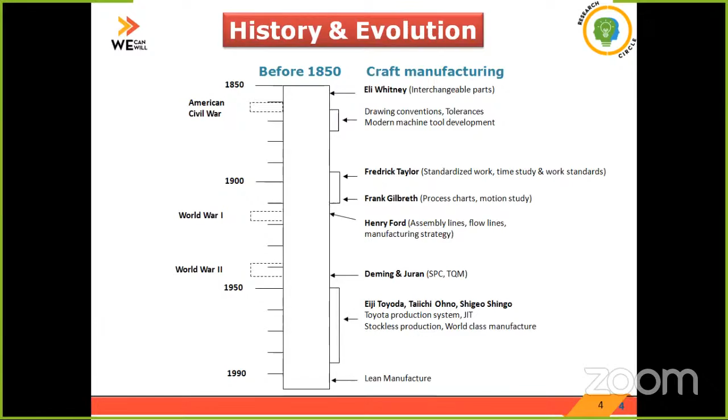So these are the issues which lean manufacturing has been addressing. Basically, the inventory in the stock room is growing, so we have to reduce the inventory. The lean manufacturer takes care of the inventory. So how do we grow? How do we make the right product at the right time? We have to make a competitiveness in our manufacturing...

facility by improving the product cycle time. Then how do we lower stockroom inventory, or have a mechanism for reducing the inventory? How do we maintain a good quality product? We have to maintain zero defect in the product as well as the process. So these are the areas where lean manufacturing helps us grow. What is the growth strategy which we are following in the business? These are the questions in front of us.

And the answer is we could hire more people and buy more machines. Or other strategies, we could raise the price of our product, which is not practically feasible because there are a lot of competitors in the market, and the customers are there. We could hire more people and buy more machines, but that also leads to less productivity or less profit for the organization.

So currently our customers are asking to reduce the price of the product. In the competitive scenario, there will always be a concept of cost reduction, and the customers are asking for price reduction. So before we do anything, we need to become more efficient in our manufacturing, and we need to find the waste in our process. That waste is what lean management addresses. So our process should be lean in the sense we have to find our waste and cut out the waste so the process becomes very robust, very simple, and more efficient.

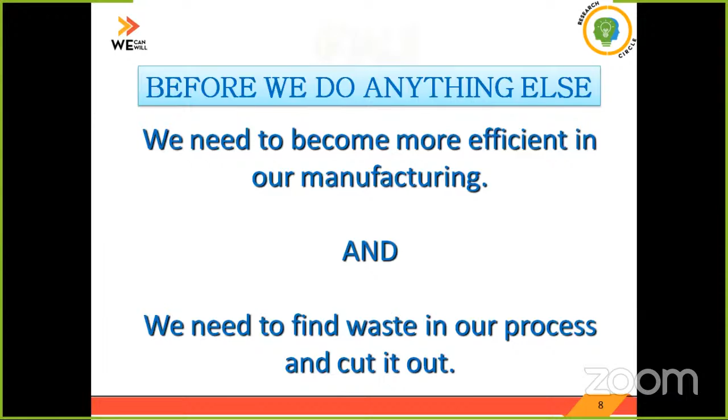in manufacturing. So the goals of lean manufacturing are to produce more product using the current resources. That means we have to produce more product using the current resources, improve the productivity, and lower the stockroom inventory, or reduce the inventory. Then we have to make an accurate forecast of exactly how long it takes to make the product and ship them on time. So we have to give the customer the product at the right time, at the right place - all of that needs to be assembled at the right time. So right time, right place is the major philosophy which we follow to maintain the customer relationship or to enhance the customer satisfaction in the process.

So what is meant by lean? You can see here an elephant and a rat. Basically, lean is a systematic approach to identify and eliminate waste through continuous improvement in pursuit of perfection. So all the processes should go toward a stream of perfection. Once you are perfect in the process, you will be able to apply lean, reduce rejection or wastage, or reduce the inventory, etc.

So what we have to do now is first identify the waste associated with our processes. The different types of waste are coming in the next slide. We have to identify the waste associated with the production activities, and we should have a mechanism to eliminate the waste through continuous improvement.

We should not stop our activities assuming that everything is perfect. No, it is not like that. We should have a system of continuous improvement by identifying the waste, then eliminating the waste through continuous improvement in order to have a path of perfection. So that is called lean.

So lean means the process will be very robust. We will be identifying the defect or waste, and we are taking steps to eliminate the waste. So that is called lean.

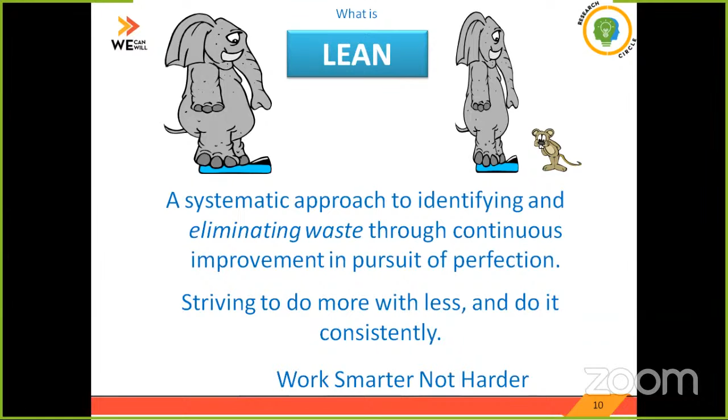The purpose of lean is striving to do more with less, and to do it consistently. We have to make a consistent product in the course of production, and we have to work smarter, not harder. We should be smart enough to work so that we achieve the goals.

Another definition of lean is that it's a systematic approach to identify and eliminate waste. So in a systematic way we have to identify and take action to eliminate the waste, what's called non-value added activities. We have to consider only the value added activities during the process, and eliminate all the non-value added activities.

This is done through continuous improvement by following the flow of the product and the pull of the customer in the process. But there are two concepts: pull and push of the customer.

Pull means the customer takes the product from the previous process. We have an internal customer, and the internal customer takes the product from the previous process, pulling it from there. Also, for the final product, the customer will pull the product from the company. That's called pull.

The other concept is called push, where the customer does not want the product, but the manufacturer pushes the product into the customer's godown. Or if it is an internal customer, we push the inventory to the process owner, etc. So we should follow the pull concept, not the push concept.

The push concept will increase the inventory of the product, whereas with pull, the inventory is reduced, and whatever the customer needs is taken from the godown, etc. So in lean manufacturing, we have to follow the pull concept for perfection.

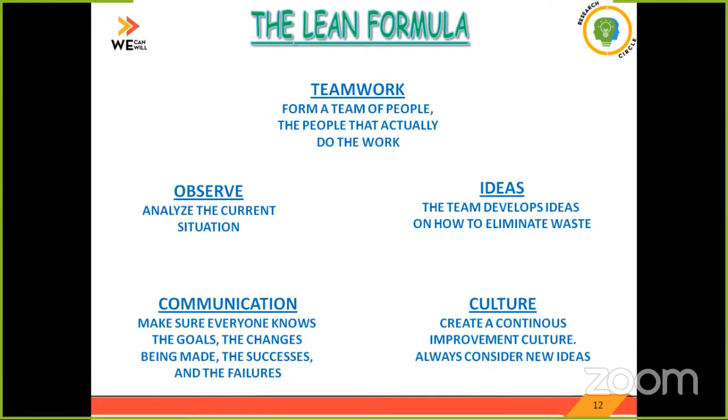Once the ideas are identified, they will be communicated to all the people, the change being implemented, and the successes and failures relating to the change will be communicated to all the stakeholders. Then we have to observe the current situation, and based on that, see what level of improvement we achieve. This is the main concept of the lean formula, which involves teamwork, ideas, culture, communication, and observation.

So there's another concept called the lean toolbox. Generally, what's involved in tools? It involves different types of tools in lean. For effective implementation of lean, we have to adopt each of these tools, which we are coming to in the next slides.

The first is we should have a 5S system before implementation of lean manufacturing. 5S means maintaining housekeeping or good cleanliness at the workplace, which involves: first we sort the waste, set in order, then shine, meaning we make all items perfectly clean. Then we follow rules and sustain the rules. That's called the 5S concept.

So 5S is basically a cleanliness concept. Once 5S is implemented, a team should be developed, which is called team formation. Then we should have quick change and standardized work practices - we should have an SOP, or standard operating procedures, relating to each of the activities so as to have a standardized workflow in each of the places.

Then we should have visual control. Any control in the process can be done through visual controls, so that each person doing the job has more accuracy and awareness, which is created through visual control. For example, rejections, wastages, and other defects in manufacturing can be made available or communicated through visual control, so it's more clear to the people.

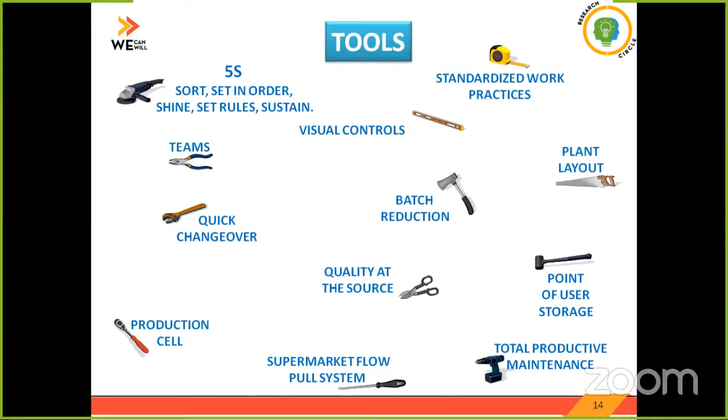Then quality should be at the source — whoever is responsible for carrying out the job is responsible for quality. The pull system should be followed, along with point of user storage and total productive maintenance. These are the various tools of lean manufacturing.

One of the most important terms used in lean manufacturing is waste, which we have to eliminate. Lean manufacturing is a Japanese concept, and the term for waste is 'muda'.

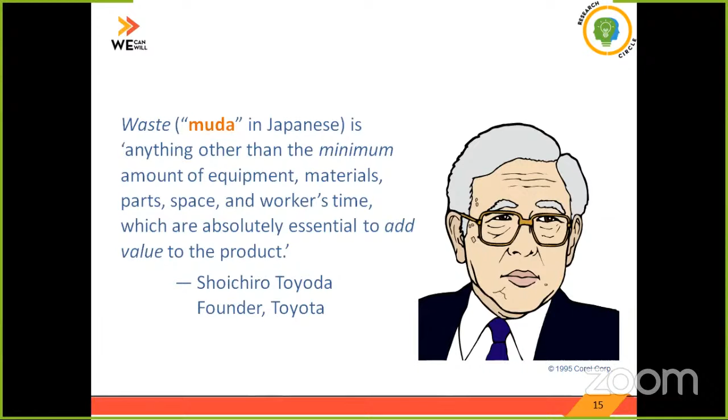Muda means waste — the minimum amount of materials, equipment, parts, space, and workers' time absolutely essential to add value to the product. We have to reduce waste in terms of time, quantity, resource utilization, spares, and inventory — all these contribute to waste. So the concept of muda, or waste, means lean manufacturing involves reduction or elimination of waste from the process.

Now let us see the different types of muda associated with lean manufacturing. Toyota was the first company to implement lean manufacturing, and they identified 7 types of muda in the manufacturing system: storage, transportation, waiting, motion, process, defects, and overproduction — all different types of waste associated with the manufacturing system.

Storage — if you have storage in excess quantity, that is waste, meaning high inventory. If you keep higher inventory, that is waste. Then transportation — if you transport the product over a longer route, that may lead to more wastage, so we should have a system to optimize the transportation.

Then waiting — if you wait on the product, that leads to additional cost, waiting time, and queuing costs, which is waste. Then motion — unwanted motion of the operator while doing the job should be standardized, so standardized work practices are followed and waste can be eliminated.

Next, the called process. When the process is running, there will be rejections coming. So we have to reduce the process rejection, etc.

Then defects generating from the process also lead to waste. Then we have overproduction. If you produce more than what the customer wants, or quantity which is not needed, that is excess production, that is overproduction. That also is a waste.

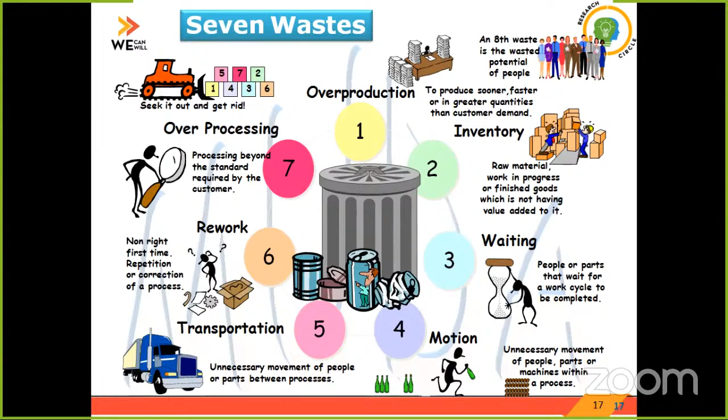Generally, the concept of lean arises due to variation or variability in the process. Universally, no employees, no machines, and no suppliers have exactly the same standard specification. We cannot see all employees in the organization as the same; everybody will be different. The machines are also the same way—even with the same technology, similar type and specification of machine, the machines behave differently. Not all machines behave in the same manner.

And suppliers—even the same supplier, if giving the product in 2 different periods, that will be different; we cannot ensure the same quality throughout. Same is the case with the same product supplied by different suppliers; we cannot ensure all products are of the same standard or quality. There will be variation, of course, in the process.

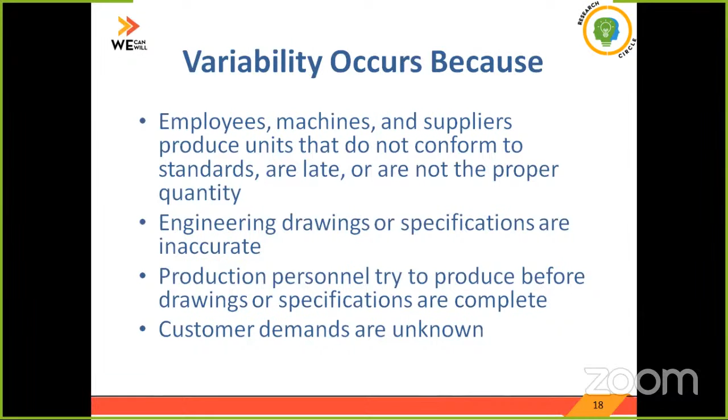Variation in the sense there will be variation in the engineering drawings or specifications, and production personnel try to produce before drawings or specifications are complete. So we have to make perfect drawings and specifications based on customer demands. Basically, all these are done based on the customer demands.

Then there's a continuous flow. In lean manufacturing, the process should be continuous because the products are produced and moved from one item to another at a very small and consistent batch of items through a series of processes, continuously as possible, with each step making what is required by the next step.

You have to make the process based on the need of the customer. If you have an internal customer, an internal manufacturing system, we should ensure that the internal customer is aware of your product, and based on their needs and expectations only, you make the products. Then only can we say the product is consistent.

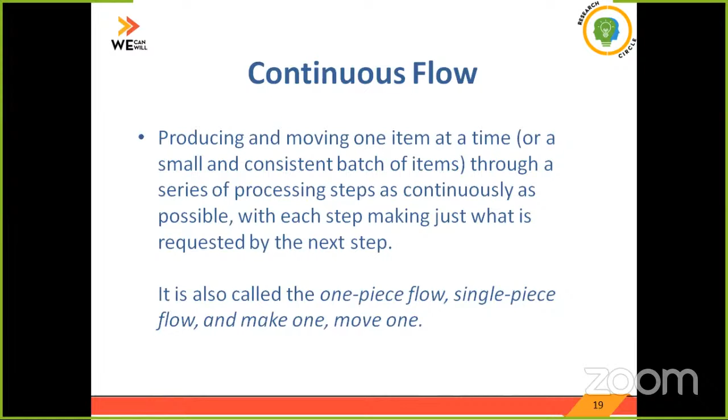So this is called a one piece flow or a single piece flow, make one, move one, a standardized product meant for a specific customer. That's called continuous flow, which involves producing one item at a time or a consistent batch through a series of steps.

That's also called mass production. Mass production means batching. We have to make different batches in different processes, and we have a queuing of the batches. We have to wait for that, so that's called mass production.

Lean production has no queuing, no batch. Once the batches are produced, there will be different processes and different batches produced, with a continuous flow and minimum lead time.

In mass production, there's not a systematic approach; there should not be any lead time, but lead time varies from process to process, and some batches need a waiting time. For lean production, there's absolutely a continuous flow without any queuing of the process, and we have to calculate the lead time in minutes.

So you can see the difference between a traditional flow and a lean flow. Traditional flow means we have a supplier supply the product, you keep it as inventory, you make production. Once you make the production, some materials will be kept as inventory, then the product after manufacture will go to the customer.

Now we have the flow with JIT, just in time flow. There's a concept called just in time flow, or zero inventory, needed for implementation of lean manufacturing. This involves suppliers and customers. Suppliers provide the material to the customers at the time the customer needs it, meaning we are not keeping any inventory.

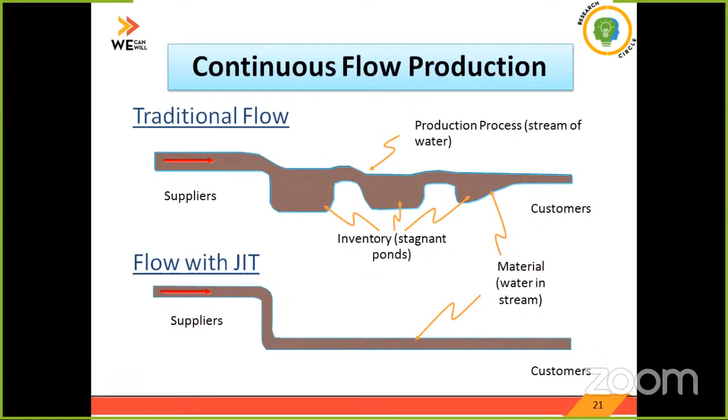Whatever the customer needs now, it will immediately be delivered to the customer by the supplier. It involves zero inventory and cycle time reduction. So like this, I have mentioned push and pull. A push system generally pushes into the downstream workstation, the next station, regardless of whether resources are available or required, because in the push system the needs and expectations of customers are not considered. Whatever product is produced is dumped or transferred to the next station.

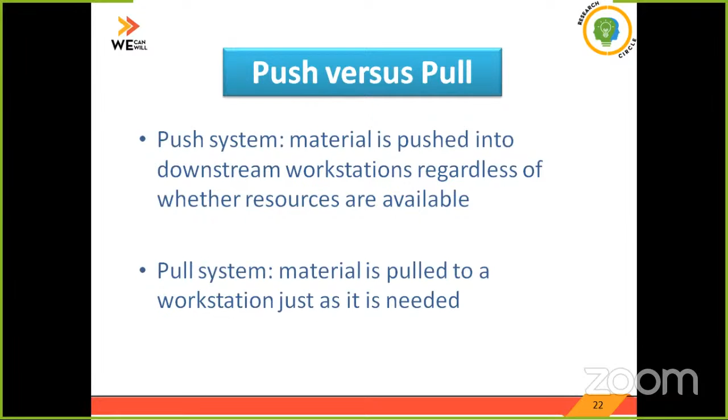Pull system means the material is pulled at the workstation. The next workstation will pull the material from the previous workstation, based on requirement, so there will not be any inventory. Pull system will be a better system compared to push system, in the sense that it will reduce the inventory.

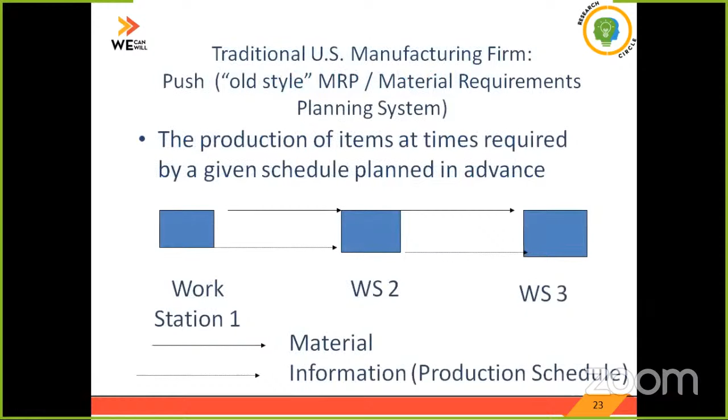If you have JIT or just-in-time, this system is very effective for implementation of lean manufacturing. Here, the production of items is based only on demand for use, not based on demand for replacement or made in advance. Only based on customer demand do we manufacture the product, through different systems like a Kanban card. A Kanban card gives an indication to the process that you should make this much quantity of production, because this much quantity will be needed for the customers. So based on that Kanban card, the production will execute the order, and then the product will be delivered to the customer, at the very minimum time. This is called a JIT system.

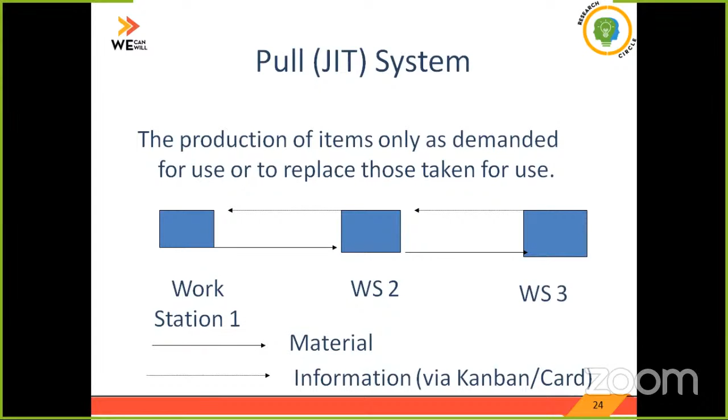Next is a very important term called Kanban. Kanban is basically a Japanese word which authorizes the production from the downstream operation. In the Kanban system, you take the production from the downstream workstation, so we have to pull the materials through the downstream station. It can be an indication, maybe a card, flag, verbal signal, etc. They are mixed with different fixed-size containers. They add or remove containers to change the production rate, giving an indication to the previous workstation that the product is being finished and you have to start production. There will generally be two Kanban cards.

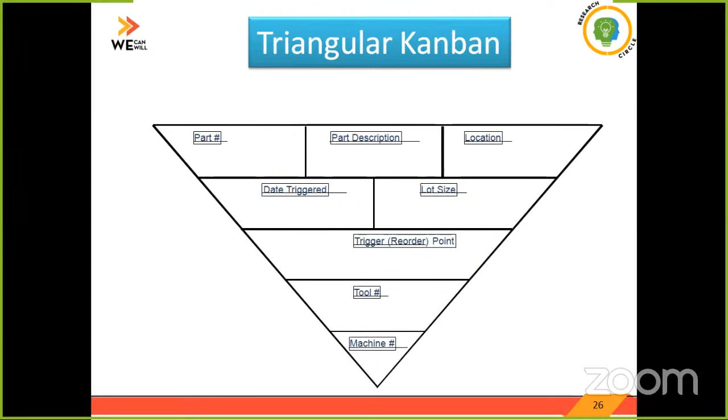We have different types of products, or what is the lot size, what machine, all the details can be put on the card along with the product. There will be two types of cards: one is a production card, and then we have a transportation card. The production card will be transferred from one station to another, and the transportation card will also be transferred from one station to another. So when the last station receives the product, their consumption will be over, meaning they will give an indication to the previous station that the material is in short supply and needs to be supplied. Accordingly, the next process owner will intimate their process owner, and so the cycle will be completed, and production will start.

So Kanban ensures that the product is produced only based on customer demand, not based on anticipated inventory. It manufactures only based on customer demand, which eliminates waste, so that all manufactured products are made only as and when needed. That is called the Kanban concept.

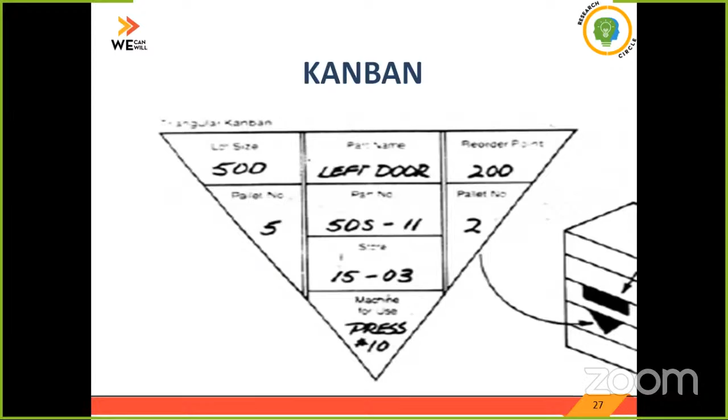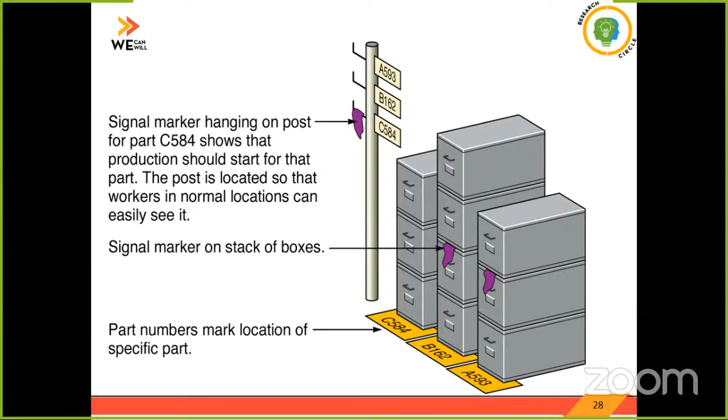You can see the Kanban, we can put some cards, like hanging ones. These are in a go-down where we have a box with the Kanban. We also have a Kanban tool where we have a post displaying different product codes. Whenever it is displayed, meaning the product stock is not there, production will start immediately. So this post will identify the normal locations where we can see the product.

There's also a concept called economic order quantity, based on how much order quantity we need to manufacture or maintain so as to have zero inventory, or inventory reduction. This can be maintained through a basic fixed order quantity model. For this model, we can have a reorder quantity, or economic order, what will be the minimum order you can place at a particular time, or what will be the reorder point, how much stock you need to keep scientifically. That's called the reorder point. Lead time is the time taken to purchase a material from the supplier. These are the various strategies we follow for inventory control and reduction.

So then we have the Kanban system. I told you there will be two cards: one is a production card and the other is a transportation card. Production is a single card system. Once the card is ready and has been transferred to the previous owners, they will start the job, and also give an indication to the next previous process so that production will start. So basically, the Kanban system is a single card system which moves along with the containers. Then we have a dual card system, which includes the production card as well as the transportation card, so that there will not be any transportation delay.

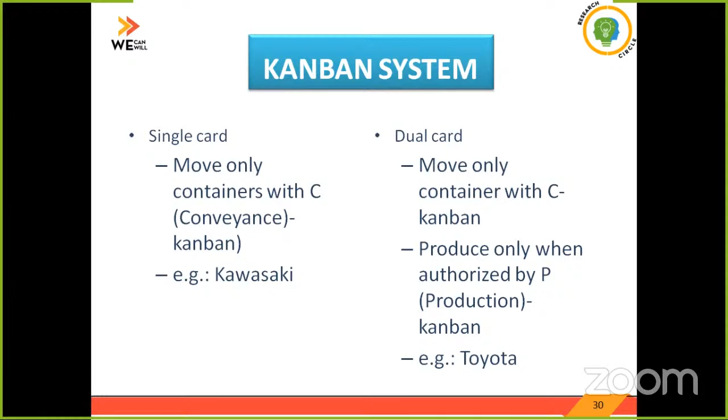So once the product is transported from one station to other, the transportation card will be removed, and once the product is consumed, there will be an indication to start the product from the previous process. Like that, all the process owners will be intimated to start the production. Along with that, the transportation card is also generated, so that the time taken to transport the material from one station to other can be estimated.

The function of Kanban is the function of inventory reorder point.

Now coming to inventory. We discussed traditional inventory, that is, inventory exists in case problems arise. Then we have just-in-time, whose objective is to eliminate inventory. Just-in-time generally requires a small lot size, because if you have a higher batch lot size, you end up with excess inventory which cannot be used. So the inventory will be a small lot size, with low setup time. Production changeover time will be very less, and containers for a fixed number of parts, each labeled and identified. So JIT inventory minimizes the inventory to keep the system running.

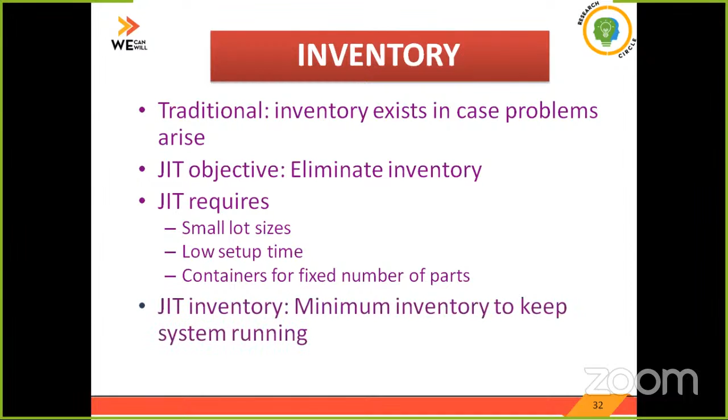In lean manufacturing, there's another term called Heijunka. Heijunka means smoothing of production. We can have different mixed models to smoothen the production, meaning we have to level the production so we cannot have excess inventory or excess quantity produced at any point. It should be constantly maintained, meaning the output of one process is the input of the other process.

You should have a customer-oriented process with equal leveling of production at each stage. This is called Heijunka or smoothing or leveling of the activities in production. It reduces the ripple effect of small variations in the schedule. Any small variation in the schedule can be addressed, so production quantities are evenly distributed over time, building the same mix of products every day, resulting in many small lots. This can be ensured through smoothing, so that we have a uniform stock throughout the process.

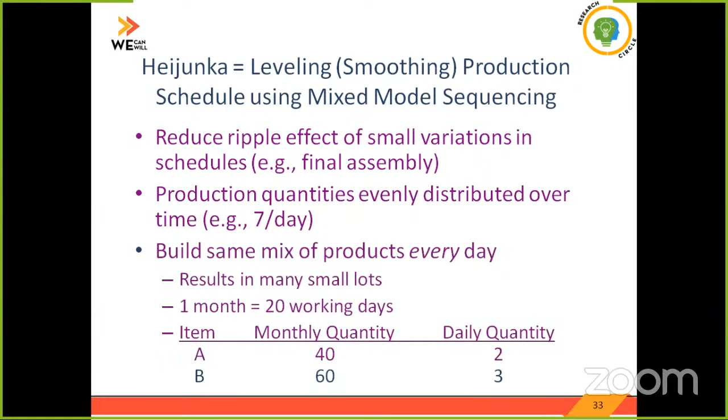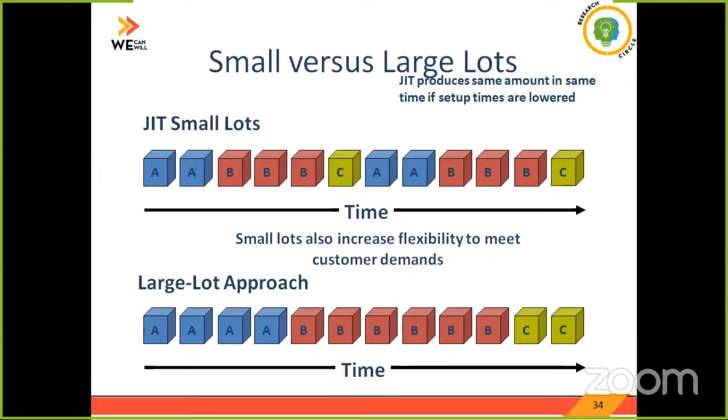You can see this concept of small lots versus large lots. With small lots, the number of lots needed is more. With large lots, the number of lots produced is less, but we must consider the time involved. So we have to optimize the time and accordingly optimize the batch size so that the cycle time can be reduced. JIT produces the same amount in the same time if setup times are lower. Small lots also increase the flexibility to meet customer demands.

Lowering inventory reduces the waste. Lean focuses on the principle that if you lower the inventory, your waste will definitely be reduced, including work in progress, scrap, etc. If you have unreliable vendors, your inventory must be higher because you need to stock more items to avoid stoppages, so work in process inventory level is high. Then we have issues relating to rejection, and the capacity becomes imbalanced, so we need a system to balance the capacity of the process.

Next, lowering the inventory reduces the waste. If you have less inventory, the waste will be very less; if you have more inventory, the waste will be high. People will over-consume material leading to rejection and waste kept on the floor, and some will generate further waste. So all this reduces the waste - lowering inventory reduces the waste.

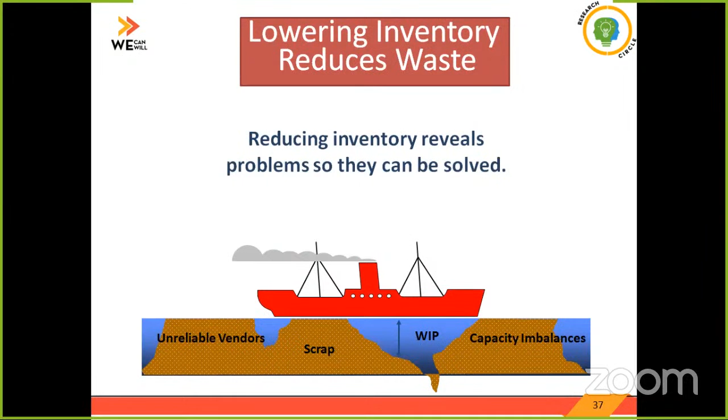So by reducing inventory levels, problems such as unreliable vendors, scrap, and capacity imbalance can be solved. All the problems associated with the process can be solved by reducing the inventory resources.

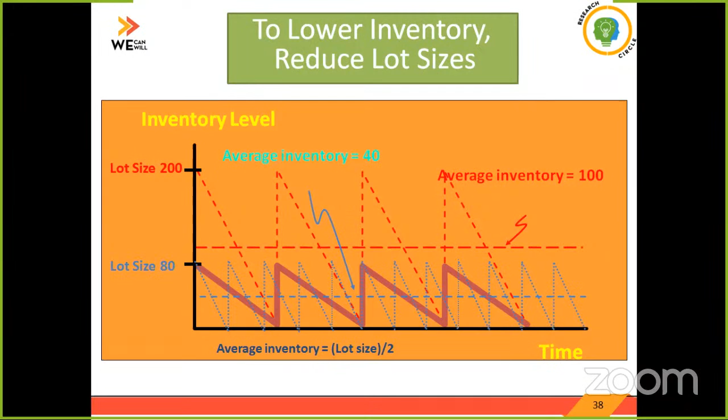Then, to lower the inventory, we reduce the lot size. We can have a system where lowering inventory reduces the lot size, so we can fix the economic or batch size needed to maintain the order quantity. So, reducing the lot size increases the number of lots - with a reduced lot size, we can increase the number of lots.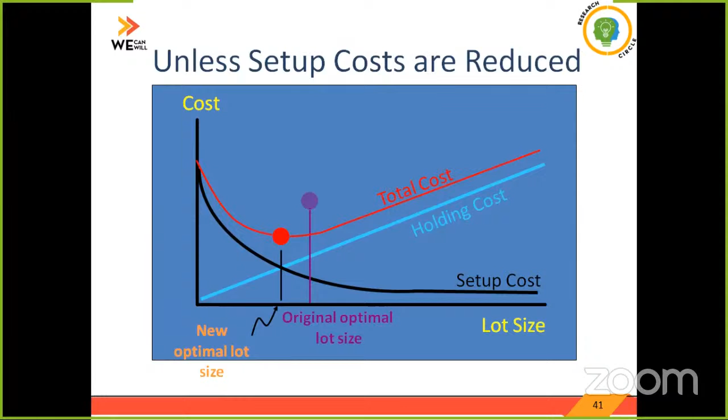Then we have to reduce the setup costs. Setup cost means the time taken to manufacture - once you have all the materials, getting the machine adjustment ready, that is called machine setup time. That should be reduced.

So quick setup means quick changeover. That means if you have one product running in a line, we should have a system such that a new product can start running next. So we have to reduce the changeover time, which is a prerequisite to lot size reduction.

Also in quick setup, we have a concept called Single Minute Exchange of Die. If you want a die change in the machine, it should be done at the earliest - that's called Single Minute Exchange. If the changeover time is more, then inventory and wastage issues will be on the higher side. This method was developed by Toyota and Shingo, and has proven effective in many organizations by reducing changeover time.

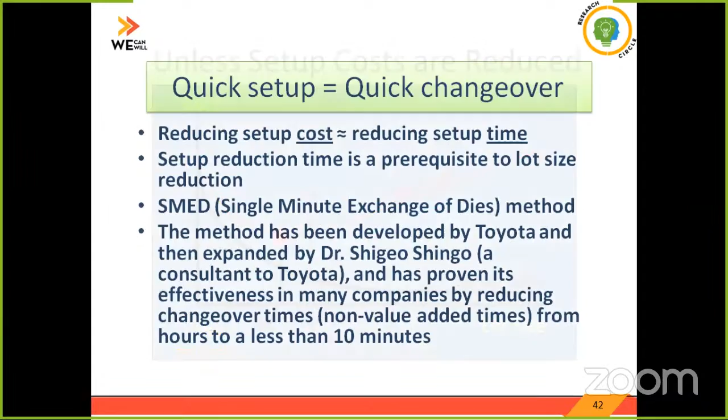The setup components - some of the components used in the product can also be used elsewhere. We have external setup and internal setup. Internal setup involves activities which need to be carried out while the machine is not running. External setup means activities which we can carry out while the machine is still operating. It is very desirable to convert as much internal setup to external setup, and internal setup improvements improve the setup procedures.

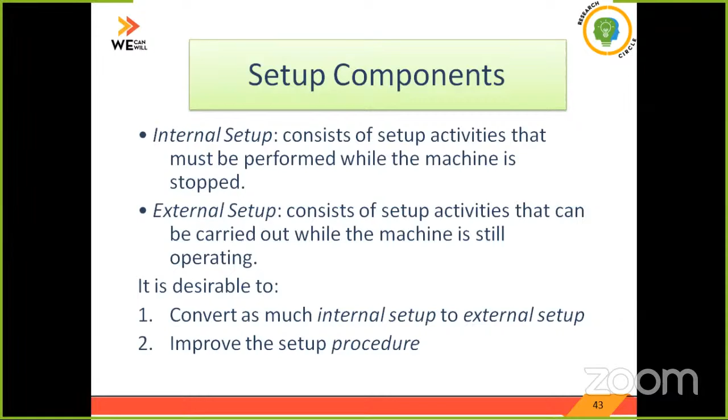Then I told you about quality at the source - that is the most important thing. Quality needs to be maintained at the source, meaning doing it right the first time. That is the philosophy of lean manufacturing.

JIDOKA allows workers to stop the production line. Workers are free to take a decision and stop the production line whenever non-conformities or anything else is noticed. They can stop production if they find excess rejections or process failure. This is called JIDOKA.

Then there's a concept called Andon. Andon is a process where we have lights, and the Andon light signal highlights quality problems. It gives an indication about the quality problem so that the operator will be more vigilant while running the machine.

The next is under capacity scheduling, which allows for planning. One of the most important bottlenecks associated with lean manufacturing is under capacity scheduling - if you have excess capacity in the process, you want to plan for under capacity. That leads to a lot of issues and affects the planning process, problem solving, and decision making.

Visual controls make problems more visible. And Poka-yoke, that's also a Japanese word, will ensure that defects are eliminated. If you have defects, you should have a system to reduce them - that is called Poka-yoke.

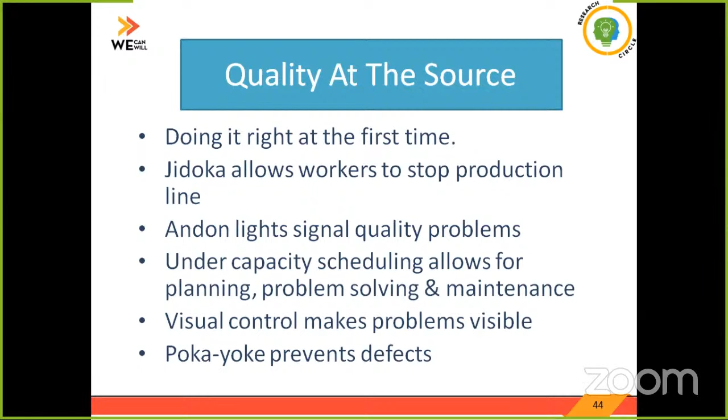Next comes a concept called the House of Toyota. Toyota was the first company to introduce lean manufacturing, and their concepts have been developed through the House of Toyota. The goal is highest quality, lowest cost, and shortest lead time.

So we have just in time, which includes continuous production, takt time, pull system, etc. JIDOKA means stop and notify abnormalities, and we separate man and machine work. We have a stable workforce consisting of Heijunka, standardized work, and Kaizen. These are the various pillars of lean manufacturing, suggested by Toyota - it's called the House of Toyota, built on just in time and JIDOKA.

So I told you that the Toyota Production System is supported by two pillars: one is Just in Time, and the other is JIDOKA. JIDOKA means autonomation, or automation with human intelligence. So we should have a system of automation as well as automation with human intelligence taken care of, done through AI, virtual reality, etc.

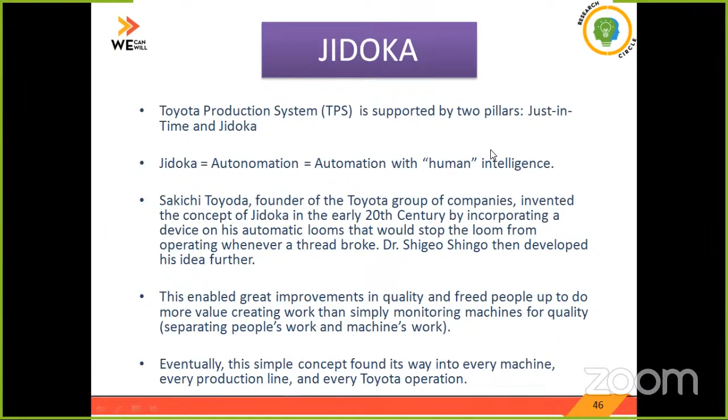Sakichi Toyoda, who formed the Toyota companies, invented a concept called JIDOKA in the early 20th century by incorporating a device into automatic looms that would stop the loom from operating when they found that a thread was being broken. Shingo then developed the idea further. This enabled great improvements in quality and freed people up to do value addition instead. So this simple concept is very effective in every machine, every production line, every Toyota production process.

There are different types of JIDOKA techniques which we can apply in industry. One is called Poka-yoke, or mistake proofing, generally used by all industries. It's a mistake proof strategy - if you have a feeling that the operator will make mistakes, we should have a system in place to reduce the wastage, etc. So it's called Poka-yoke, or mistake error proofing.

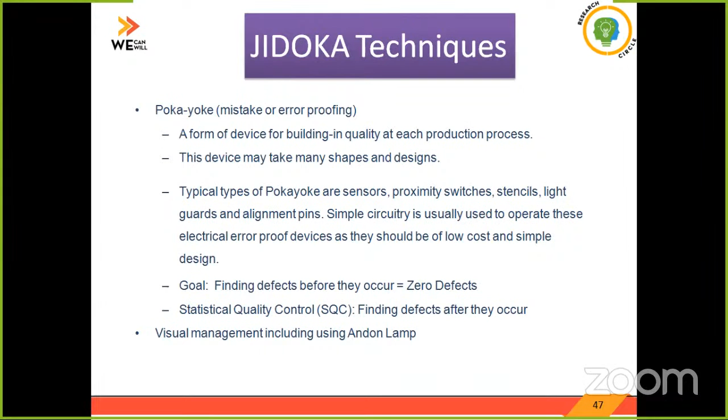We should have a concept called visual management, which includes the Andon lamp that I discussed earlier. We should have a system for the operators or people operating the machine to give an alarm that the production process they are running is wrong, or give a visual display through a lamp. So it's called a visual Andon lamp, and there are different examples.

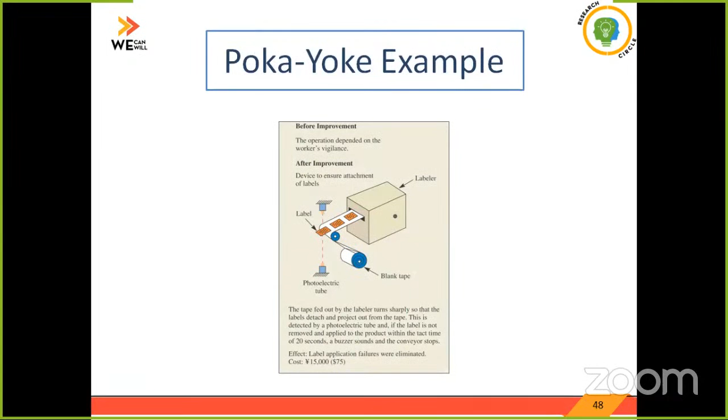Mistake proof activities - we should have a system of reducing mistakes. You can see the visual example, a view of the manufacturing floor, where the floor is kept with storage racks that can be visible. This view of the manufacturing floor involves different types of machines, different products, storage, etc. All of that comes under it.

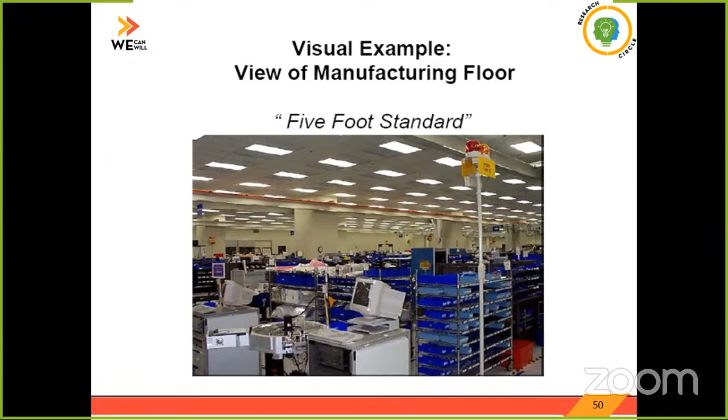Then we have a view of the manufacturing floor called the 5-feet standard. Then you can see the Andon lamp, then the red line in production - we have red line for stoppage, yellow for call for help, and green for normal. When normal operation is being carried out, there will be a green signal. Red means stoppage, and the machine will show an alarm as red. If the operator wants help from the machine or the maintenance team, they should press it, and then yellow will be glowing. So that is a visual display which can be used for effective communication in the workplace to reduce defects.

As a visual example, you can see there are different color coded tool trays which will be kept in the respective locations, or earmarked areas, so that it can be tracked by anybody else in the organization. That's called color coded tool trays.

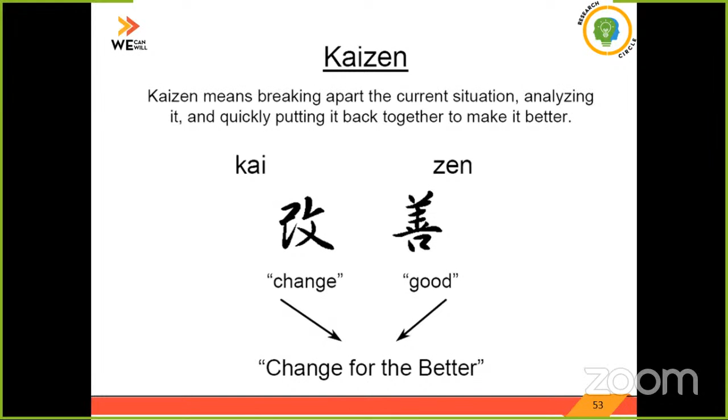Kaizen is basically small projects which analyze the current situation, and we have to analyze the situation and make it better - what we can do better, etc. That's a small improvement which is implemented, called Kaizen, meaning change for better. It's a Japanese word that has been implemented in many organizations as part of continuous improvement. Kaizen involves a lot of workshops with teams from various activities and various streams, which leads to significant improvement in the process. This creates a manufacturing cell.

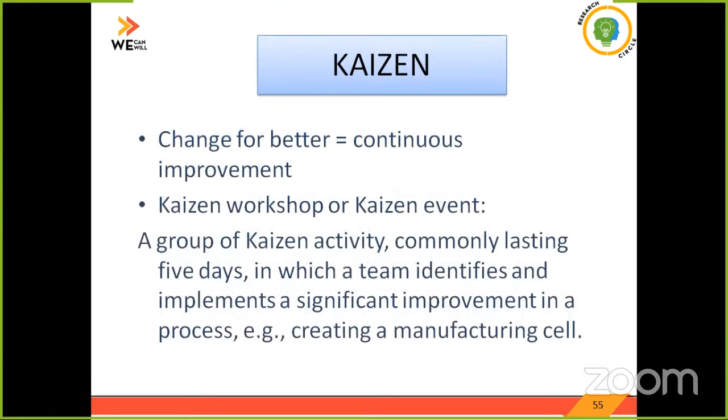Then another term is called GEMBA, a Japanese term which means the real workplace. The concept is: whenever any value addition activities are carried out, that is only carried out to satisfy the client, then it is called GEMBA - the manufacturing place. So going to GEMBA means going to the workplace to see what real improvement has happened.

So if you have a shop floor issue, what we have to do as a manager or general manager is visit the site and analyze the problem directly, rather than getting information from different people. That may lead to good value addition - that's called the real place. In GEMBA, generally we do a GEMBA audit, which ensures the process is audited by the respective people, and they find improvements based on the visit, which are then implemented.

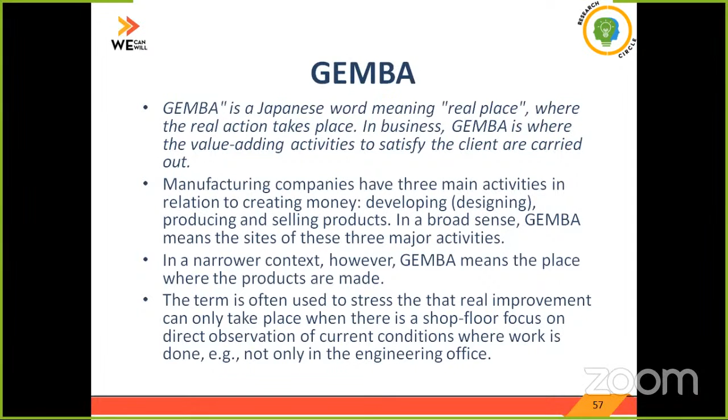The Japanese identified 5 golden rules of GEMBA as part of implementing lean manufacturing. First, Kaizen is the key to Japan's competitive success. The first golden rule: when a problem appears, we go to GEMBA - first we see the shop floor, or equivalent, and we go there.

Golden rule 3 is we have to take action - find a solution for the problem and implement it. Rule 4 is to find the root cause of the problem; once found, we implement the solution. Rule 5 is standardize to prevent reoccurrence - once you find a solution, we standardize it so it prevents the problem from recurring.

So the GEMBA rule is used for improvement in the workplace. If you have specific problems, first we analyze the problem by going to the workplace, find the root cause, find a solution, then verify whether the solution taken is correct or not. That's the 5 golden rules of GEMBA.

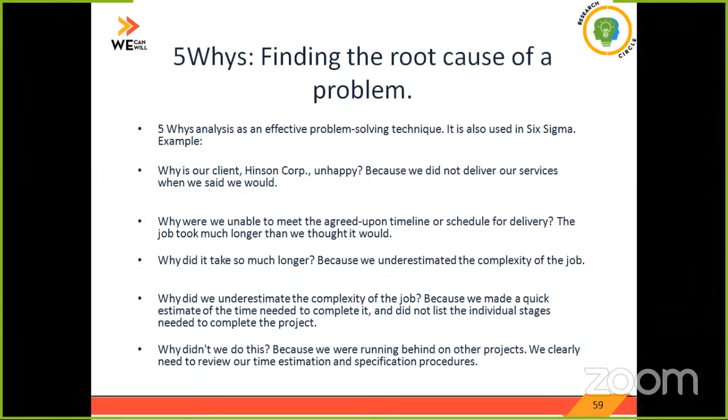So if you have a problem relating to a question, we have to ask five times why. The fifth why will give an answer for the problem. That's another basic approach followed for lean manufacturing.

Then another basic concept followed is called the PDCA approach in lean manufacturing - plan, do, check, act. It is called the Deming cycle, wherein first, if you want to do any Kaizen programs etc., we have to plan what is the achievement, what is the level of achievement, or what should be the focal point, and what will be your target in a quantitative manner.

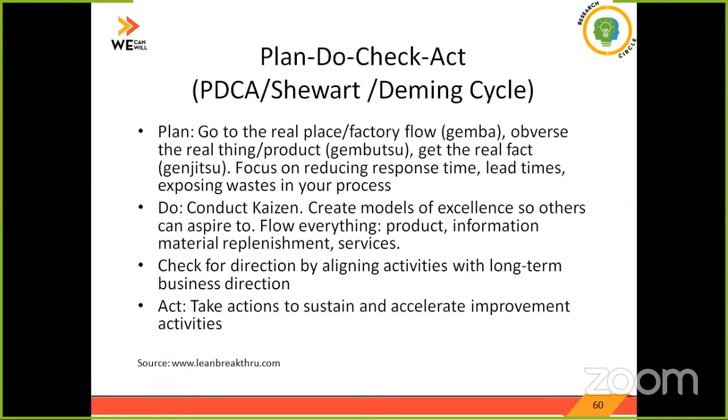Then you conduct a Kaizen, or find the root cause of the problem. We have to find a model of excellence etc. Then we have to align the activities, then act. Once you align the activity and carry it out, you have to celebrate the success, etc., by the improvement process. That's called the plan, do, check, act, PDCA approach.

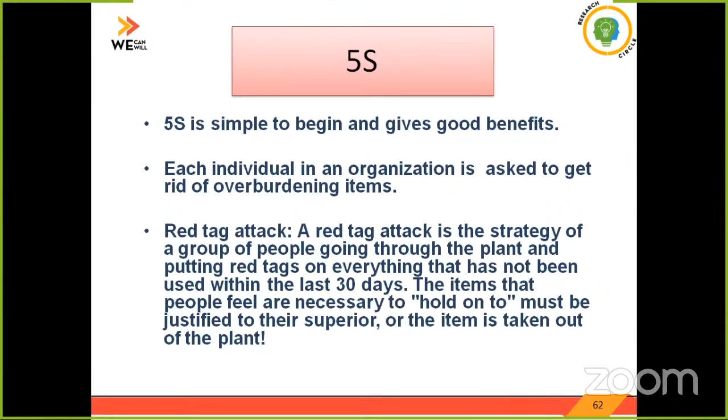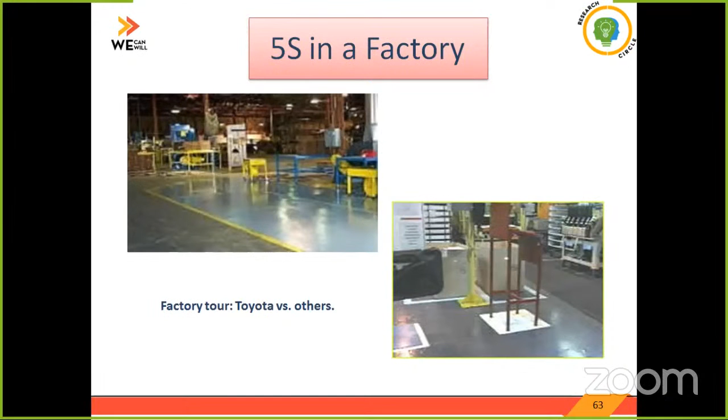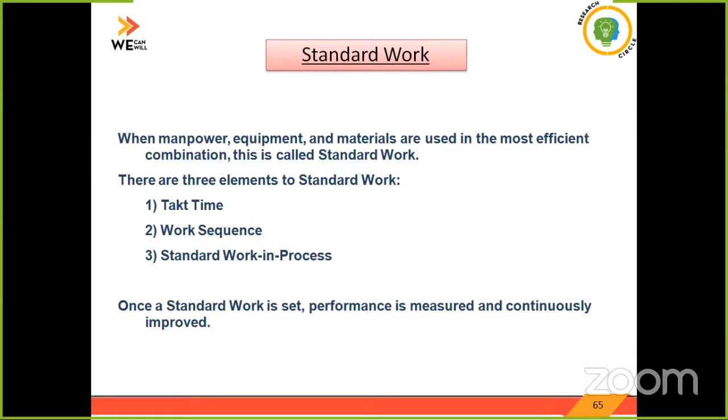Then coming to standard work, as I have told you - the standard work means we have resources like manpower, equipment, materials, all combined together, so all should work at the same time, their activities leading to standardized workforce etc. The standardized work means takt time, work sequence, and standardized work-in-process, so that we can manage the standard workflow.

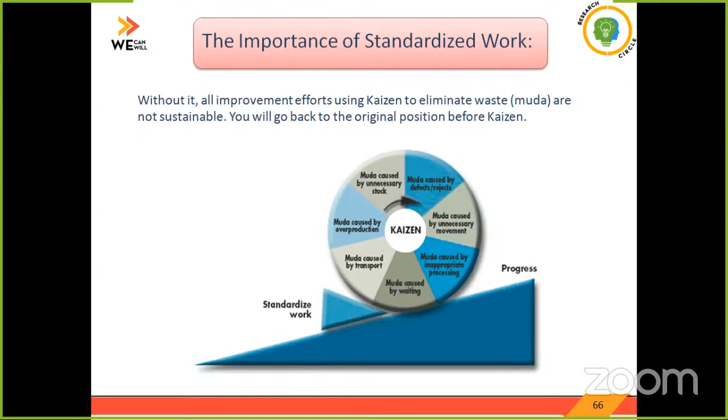So, the importance of standardized workflow - if you don't have all the standardized workflow in hand, it means the improvement efforts in Kaizen to eliminate waste are not sustainable; you will go back to the original position before Kaizen. You can see, even if you have a Kaizen in place and the waste elimination practice is not there, still we can go for standardized work practices.

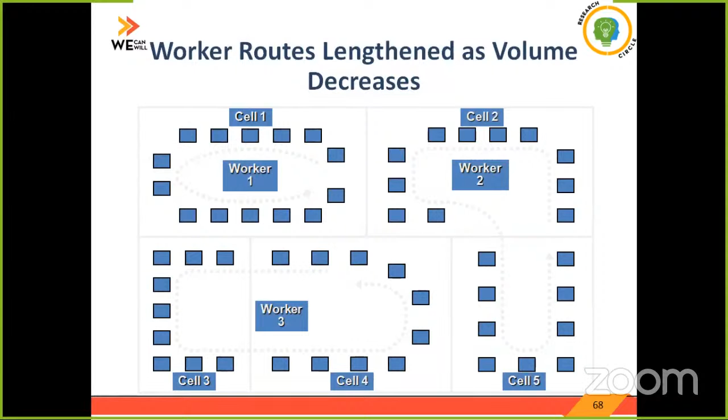For standardized work practices, we have different types of layouts, like manufacturing cells. Layout is one of the major factors I mentioned. Plant layout includes the line layout, where assembly cells are the preferred configuration for line balancing under demand fluctuations. There are different types of cells in which each worker or employee is associated with a different cell to carry out different jobs, with n number of jobs carried out across all the cells.

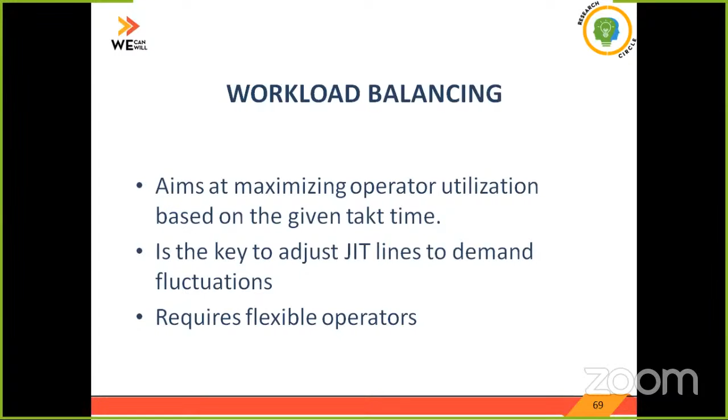Then we have workload balancing. Workload balancing aims at maximizing operator utilization based on the given takt time. It adjusts the JIT lines to demand fluctuations and requires flexible operators.

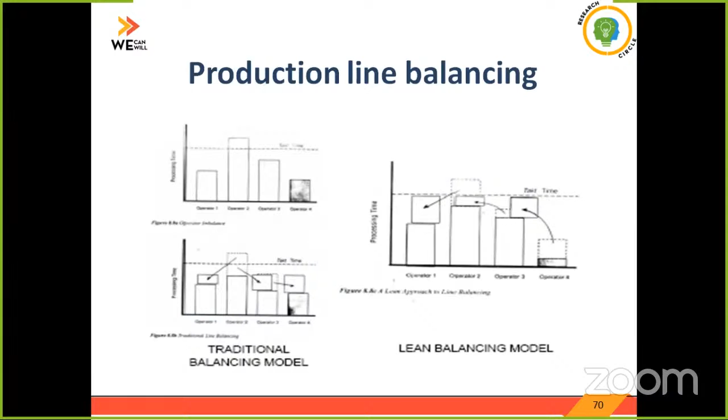You can see the production balancing in a lean model. The product should flow easily from one process to another, so there should not be any hold up. That's called the lean balancing model of production line balancing.

There are a lot of theories and attributes, because we use JIT to eliminate inventory, which lean manufacturing builds a system to help people produce a perfect part every time, reducing the spares requirement. It educates and trains the suppliers, develops close relationships with suppliers, and encourages only value-add activities while screening out non-value activities. It develops the workforce, makes the job more challenging, reduces the number of job classes, and builds worker flexibility. This lean manufacturing adopts the principle of total productive maintenance.

Now let us see how a Toyota system works. Lean manufacturing is implemented very well in Toyota, with different steps created by Toyota for its implementation. First is specify value - they define the value from each customer.

Second is value stream mapping. We have to identify the critical activities needed for the business - that's called value stream mapping. Through value stream mapping we map the process and see what activities are needed for the current situation and which are not. That feedback is taken as the value stream mapping.

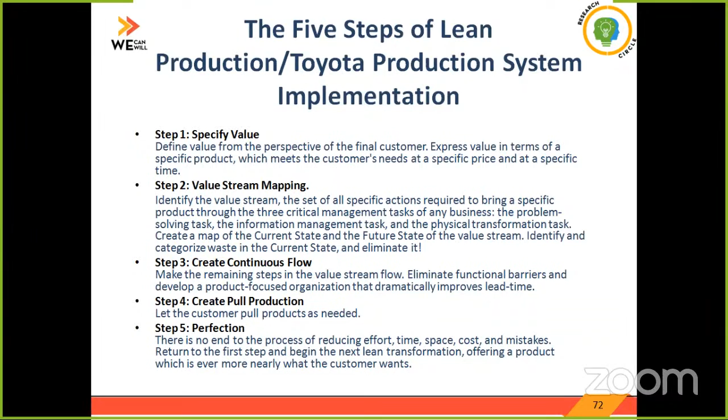First we find the value, the definition of value for the customer, and express the customer value in terms of the product. Then we do value stream mapping by mapping the different management tasks and how they are fulfilled. Then we have continuous flow of materials, then we create pull production, then we make it to perfection. So these are the 5 stages of Toyota lean production.

There's a concept called lean and green. Lean is basically a concept which involves green engineering, with the objective to reduce use of natural resources and have limited resource usage so it will be useful for the next generation, and it is more environment friendly.

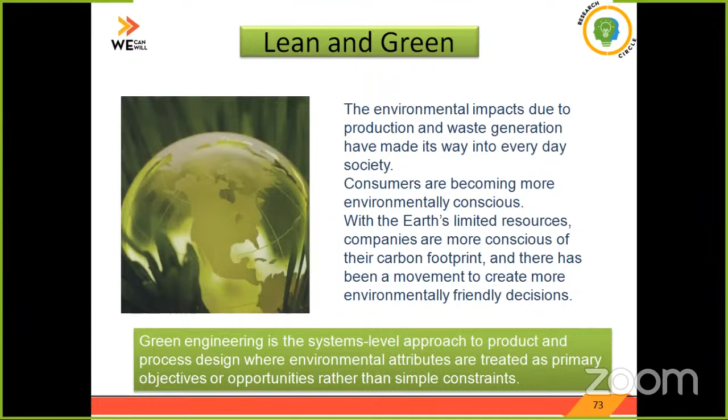Green engineering is a system-level approach to the product and process, where environmental attributes are treated as primary objectives. So all activities like lean go along with green - then only it becomes perfect lean. Consumers are becoming more environment conscious, and since we have limited resources, we should reduce carbon footprint and create more environment friendly decisions. So it can be linked with green engineering.

Lean manufacturing is basically a business model and collection of tactical methods that emphasize the elimination of non-value added activities by delivering quality products at lower cost with greater efficiency.

The 6 goals of green engineering are: select low environmental impact materials, avoid toxic and hazardous materials, choose cleaner production processes, maximize energy and water efficiency, design waste minimization programs, and design for recyclability and reuse of materials.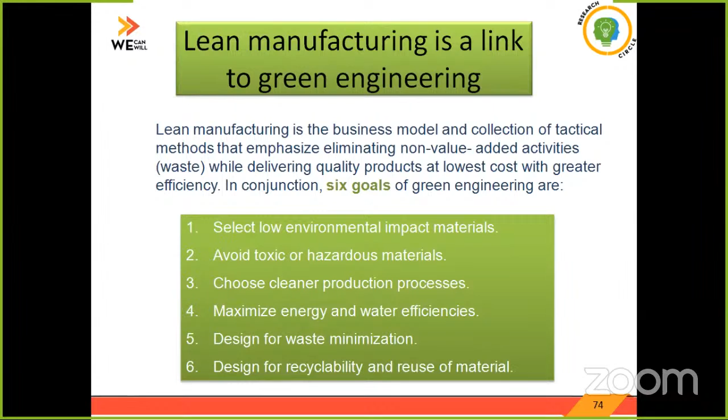So as population grows or waste increases, the fossil fuels are being diminished and there is nothing to replace them. So consumers become more aware of environmental products. Lean and green is so important to reduce the consumption of natural resources and to optimize resources, and we have to reduce the carbon dioxide concentration in the Earth's atmosphere, thereby reducing the carbon footprint.

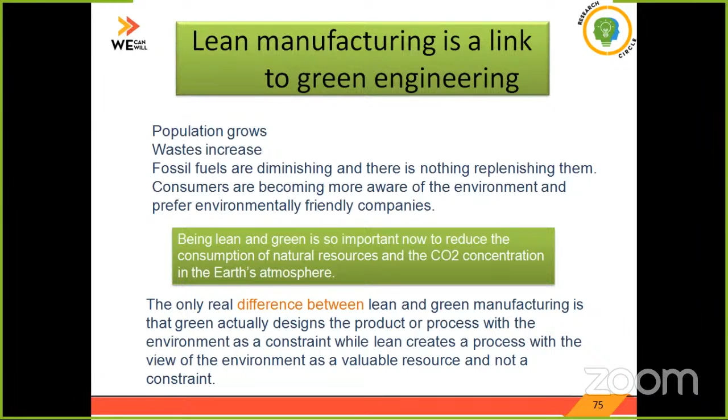So the difference between lean and green manufacturing is that green actually designs the product or process with the environment as a constraint, while lean creates the process considering the environment as a valuable resource. Thank you, this is what I conclude about lean. I will be showing a small video of the lean manufacturing process.

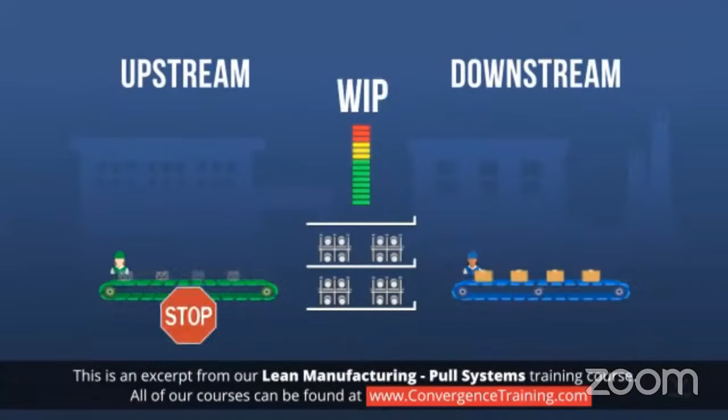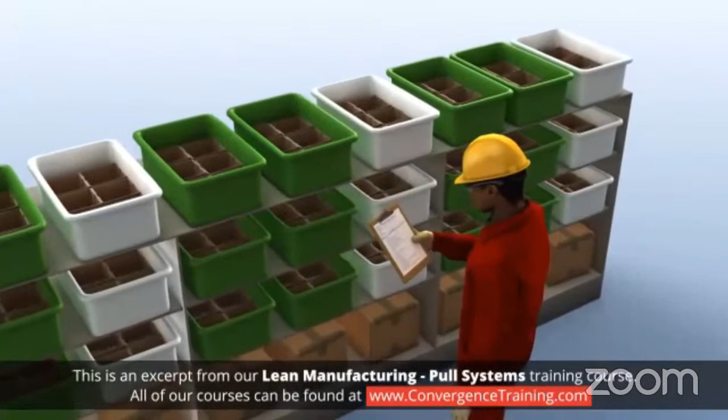A pull system basically limits the amount of work in process, WIP, that can be in the system at a given time. Replenishing of supplies or production is determined according to actual customer orders that have been received. The sale of that product has already been negotiated. A pull environment will come from real demands and products only made to satisfy real orders. A work item can only be in process if there's a demand for it.

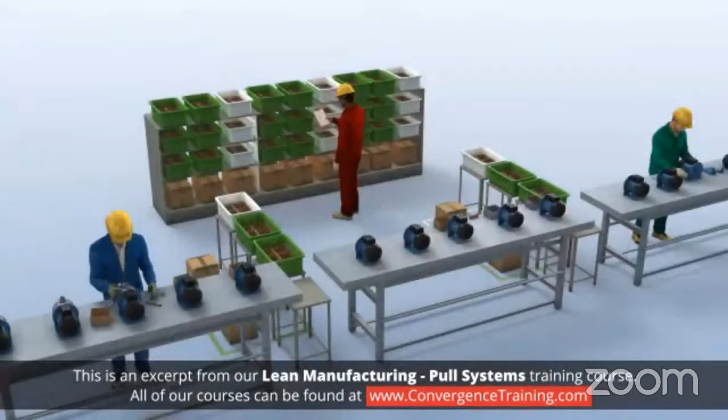This environment can be found or set at any level within an organization. We can visualize it on the production floor as well as in the flow of information between departments. A pull system is a control-oriented system that operates by receiving signals that more production is needed.

There are 2 different types of pull systems: sequential and replenishment. Sequential pull is where the downstream personnel pulls parts from the upstream supplying process in the sequence in which the prior step produces it. Sequential pull limits the amount of inventory between the 2 steps of a process. The ideal output is one-piece flow.

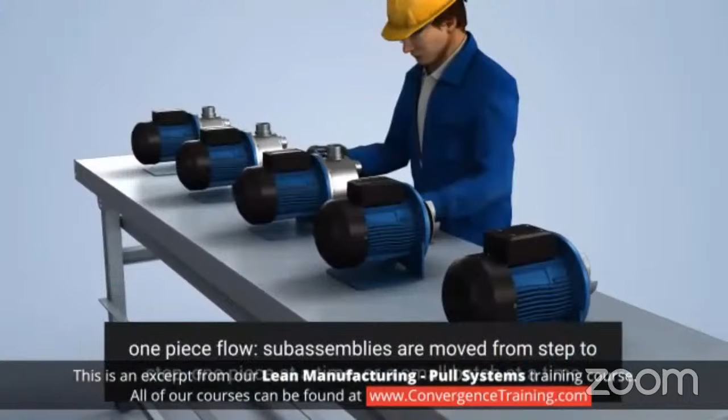When we refer to one-piece flow, we mean that sub-assemblies are moved from step to step, one piece at a time, or a small batch at a time, minimizing work in process inventory.

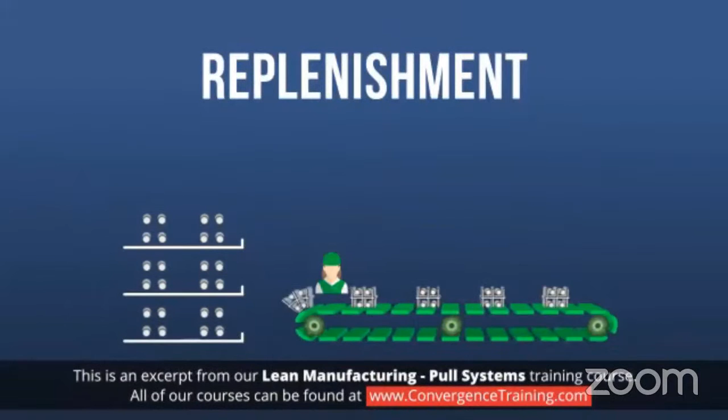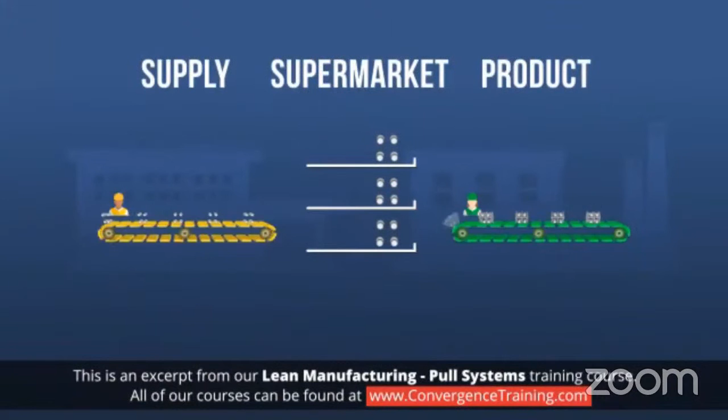Replenishment pull is where the downstream personnel pull parts from a storage location according to what they need to complete their tasks. This is like how a supermarket works, so replenishment pull systems are also called supermarket systems. The parts removed from the storage location or supermarket are replenished by the supplying process. Lean uses a concept called Kanban, meaning signal in Japanese, to manage this type of pull system.

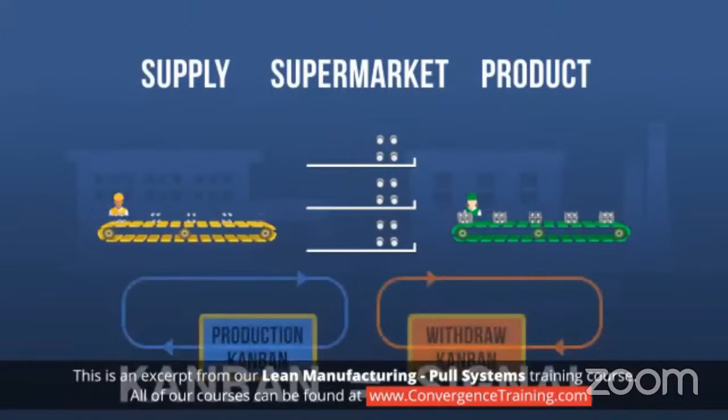Kanban uses cards to signal and communicate the need for more supplies. In the context of the flow of information, a pull system allows employees to pull their next task if they have the capacity to start working on it. This helps them to better prioritize tasks and prevents overloading, helping employees stay focused on executing the work.

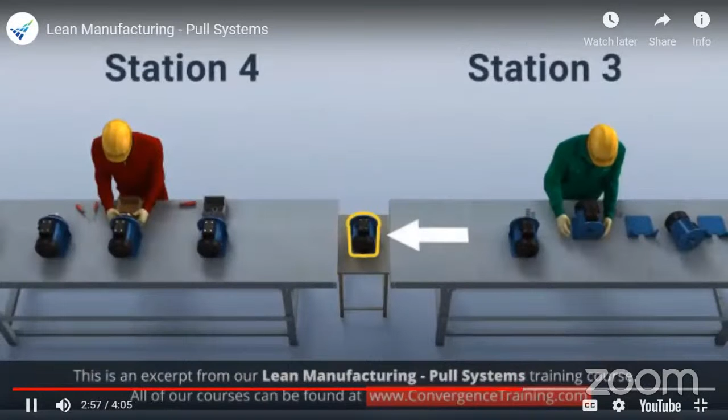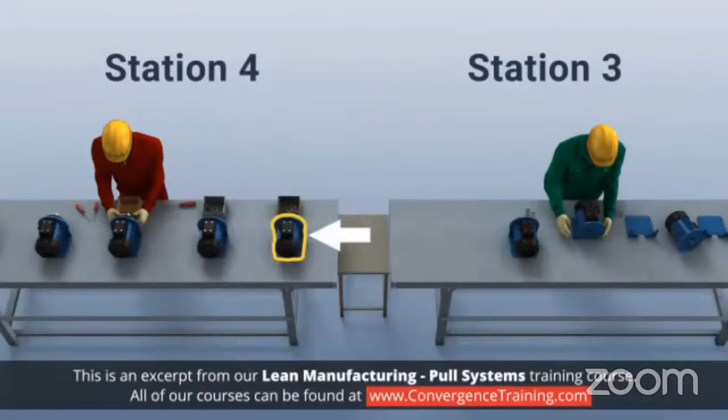Let's visualize a couple of examples that would represent manufacturing pull systems. When standing at a workstation along the production line, we notice that there's only one footprint for the sub-assembly, which can be placed between station 3 and station 4. This is limiting the amount of work in process that the operator at station 3 can produce. Upon removal of the sub-assembly by the operator at station 4, the empty footprint signals the operator at station 3 to replenish the sub-assembly. This control condition clearly represents a pull system in place.

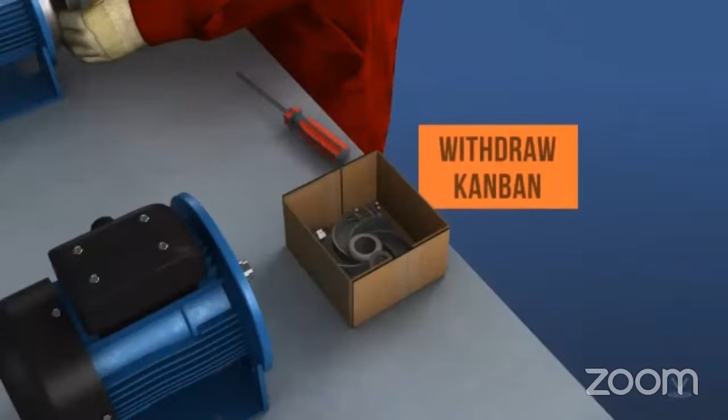Another case would be when a box of components is being consumed and a card, a light, or other signal allows material handling to bring over another box to ensure no interruption to the workflow. A pull system triggers the action only if the WIP limit has been met. In this case, the WIP limit is met when half the box of components has been consumed.